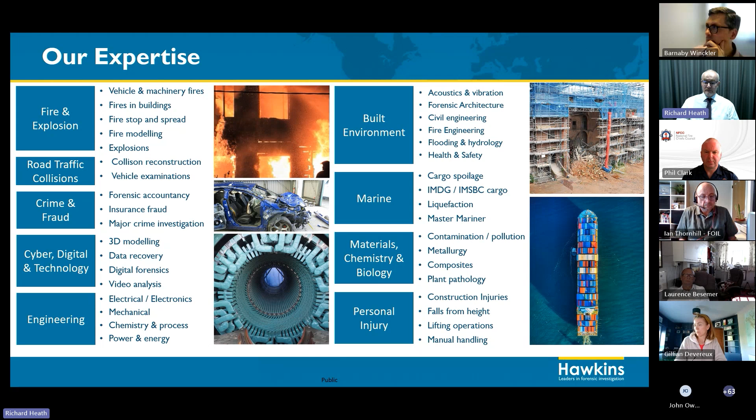When required, we can do a full investigation in order to formulate a clear and impartial report for the support of any legal action. We've got about 130 experts with impressive academic credentials, diverse specialisms and practical industrial experience, and about 50% of Hawkins investigators are PhD qualified or chartered. All of us have some form of prior industrial or commercial experience. And we've got 10 offices dotted around the UK and Ireland, and 3 overseas offices also.

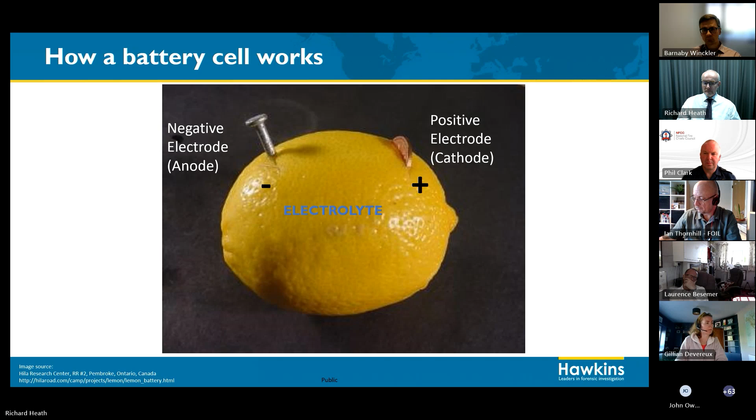And a lithium-ion battery is no different. You essentially have a container of some form with an anode and a cathode and an electrolyte between them. In lithium-ion batteries, the anode is typically a powdered carbon material fixed onto a copper negative current collector. The cathode is a powdered metal oxide active material of varying chemistry, which we'll go into a little bit later on, and that's fixed to an aluminium current collector.

You then have a flammable organic solvent containing a lithium salt dissolved in it. That forms the electrolyte within the cell, and lithium's reactivity is partly why it's used. It's also why the electrolyte is organic and flammable, because lithium reacts quite vigorously with water, so you can't make a lithium-ion battery with an aqueous solvent, so you end up using something that's organic and flammable. And then you have a separator between the anode and the cathode, which is there to prevent the two from making contact electrically, preventing a short circuit, but it still allows the ions to flow through it.

And essentially, when you discharge a lithium-ion battery, you're taking current in one direction. Ions are flowing from the anode to the cathode until they're depleted. But with a rechargeable battery, you can reverse the current direction by applying the voltage, let current flow through the circuit, and the ions move from the cathode back to the anode, ready for the next use.

And the construction of the battery is quite important. If the separator becomes damaged in any way, it can allow a short circuit within the cell. And the other components used to construct a lithium-ion battery can actually react exothermically, in a heat-producing way, if they come into contact, and it's the design of the cell which is really keeping those substances apart from each other.

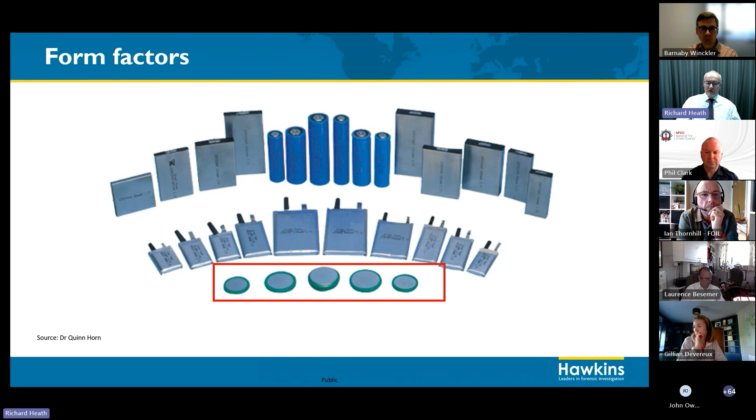Looking in a bit more detail at a cylindrical cell, an 18650 cell, so-called simply because of its dimensions. It's about 18 millimeters in diameter, about 65 millimeters long. It's basically a bit larger than an AA cell. It has a terminal voltage of about 3.7 volts, which is higher than your average AA cell. And capacity is between 1500 and 3500 milliamp hours.

To give that some context, at 3.7 volts, at that sort of capacity, it's great for head torches, small portable devices, but it's too small for any application that requires more power. So they tend to be put together in combination to form larger voltages and larger capacities. And it's those that are commonly used in electric bikes, e-scooters, and laptops.

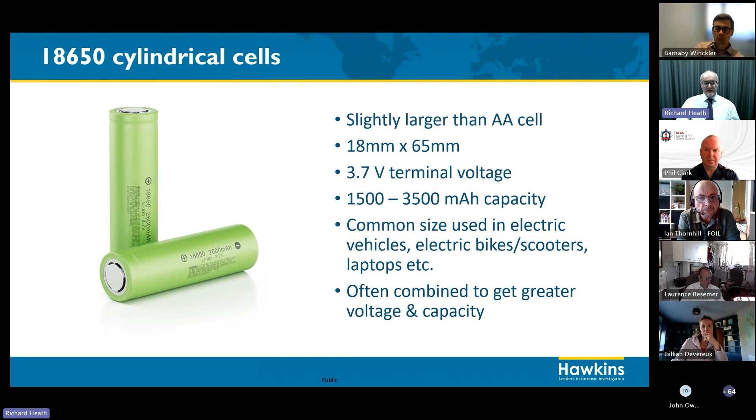Now, if we can take a cross-section slice through a cylindrical cell, so this is a CT scan through different types of battery. We've got our standard alkaline battery on the left-hand side, the non-rechargeable Duracell type, rechargeable nickel metal hydride in the middle, and then the lithium-ion battery on the right. And the striking thing really is just how densely packed a lithium-ion battery is. It's that density of design that allows a very large surface area for the active materials in the cell, which provides it with its capacity.

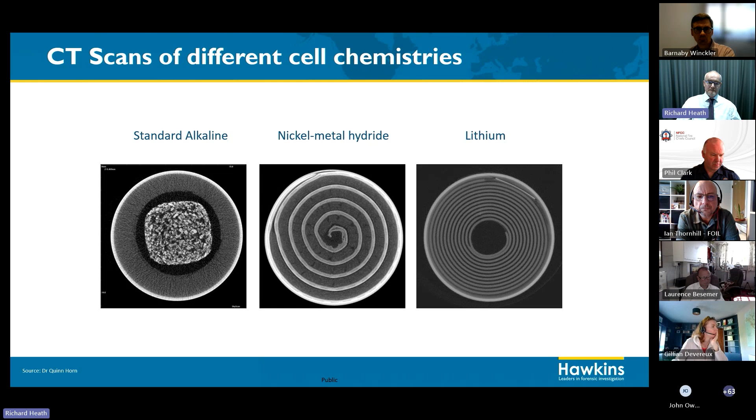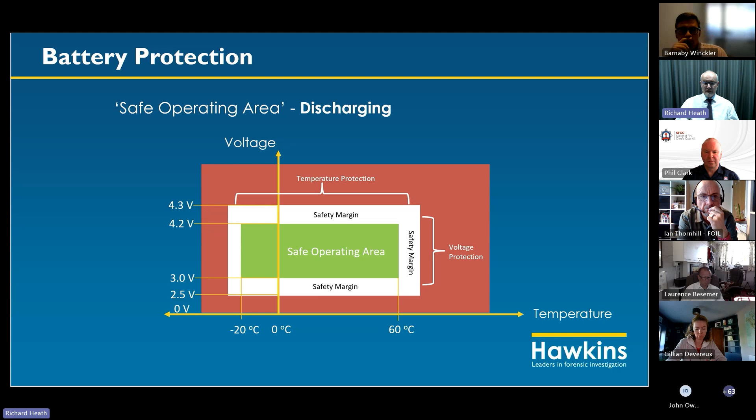If you take it to temperatures outside those areas, if you operate them at voltages, both over voltage and under voltage, outside those areas, you can get into the red area where you can then be causing damage to the insides of the battery that can then go on to cause problems later on. So in order to ensure safe operation of lithium-ion batteries, they tend to be provided with protection systems which control the voltage to remain within that safe operating range and to control the temperature within that safe operating range as well. This chart applies to discharging.

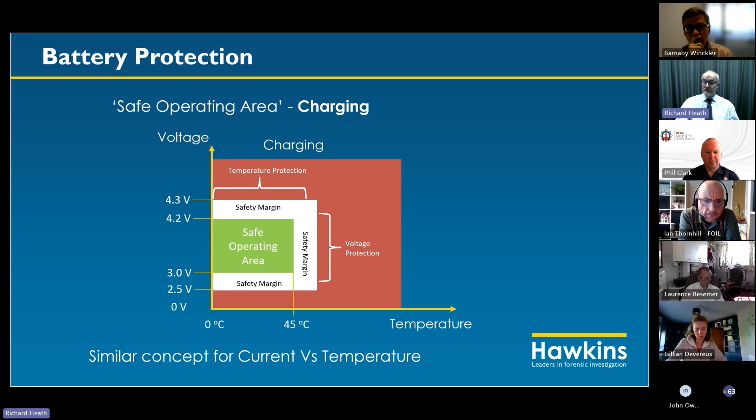Something similar for charging. The big thing to notice is there's nothing below 0 degrees C, and that's because it's really not recommended to be charging lithium-ion batteries below 0 degrees C, because it can cause damage to the battery when you're doing it. And there's a similar concept for current versus temperature. Again, there's a safe operating range in terms of the maximum current you can safely draw, the maximum current you can recharge with, and the temperatures involved when you're doing that.

So protection systems that tend to be used, some are actually built into the cells themselves, some are built into the battery when you've got several cells combined together, some are built into the device using the power from the battery, and some are built into the charger. And these include things like over temperature detection, checking if the battery is getting too warm, checking the pressure inside the battery. When they start to fail, the pressure will increase. If you have a system to detect that, that's one form of protection that's quite helpful.

Protection against short circuit, connecting positive and negative with no resistance between them. Also protecting against the overcharging of the battery in terms of voltage and current, and the over discharging protection, again of voltage and current. Anybody who's used power tools and has been trying to get a job done, and the battery warning indicator has been telling you for a while that it's getting a bit low, will have noticed that suddenly you get to a point where the tool just stops. It doesn't just slowly wind down and cease. It will just reach a point where it stops. And that's essentially the protection system in the battery saying this battery has become too discharged to be safe, and it just turns the battery off.

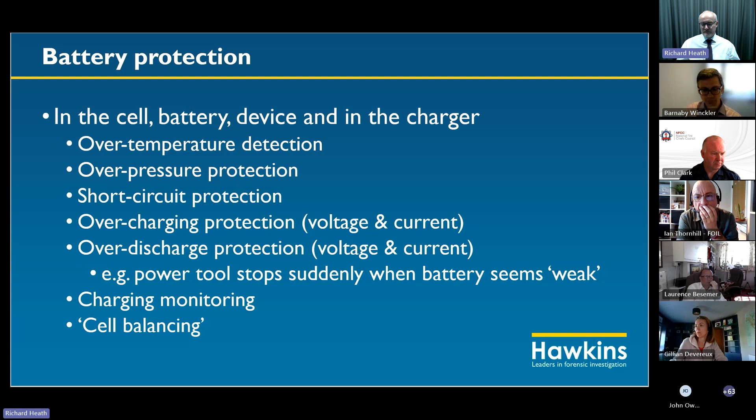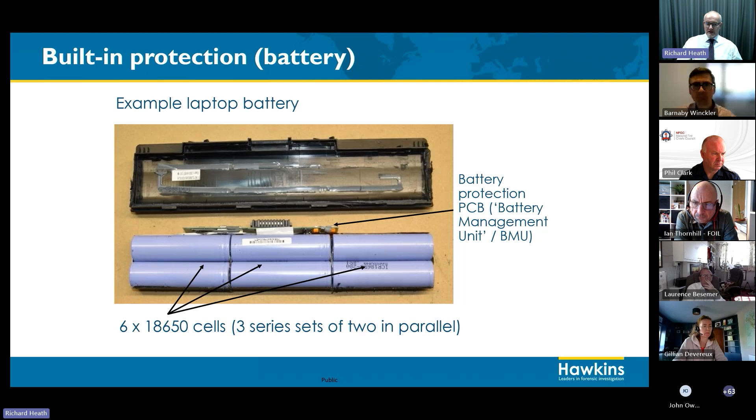And protection systems also include charge monitoring and cell balancing, which is when you've got a long chain of batteries connected together, it's monitoring the charging process to ensure that the charge is evenly balanced between the cells. So this is an example of a laptop battery that's been opened up, and you can see there's a number of the cylindrical lithium-ion batteries inside it, all connected together to provide more voltage and greater capacity. But inside that plastic casing, there's also a circuit board, which is providing the battery management and battery protection systems.

And at a larger scale, this is the sort of battery you might find inside a larger e-scooter or a hoverboard. And you have a large number of the cylindrical cells all connected together in different ways to provide greater voltage and capacity, fitted to a circuit board. And on that circuit board is the battery management system, or BMS, which monitors the charging process. And really, it's the BMS and the charger together that control the charging of the battery, and ensure that the battery pack is being charged and discharged within the safe operating window that I showed earlier on.

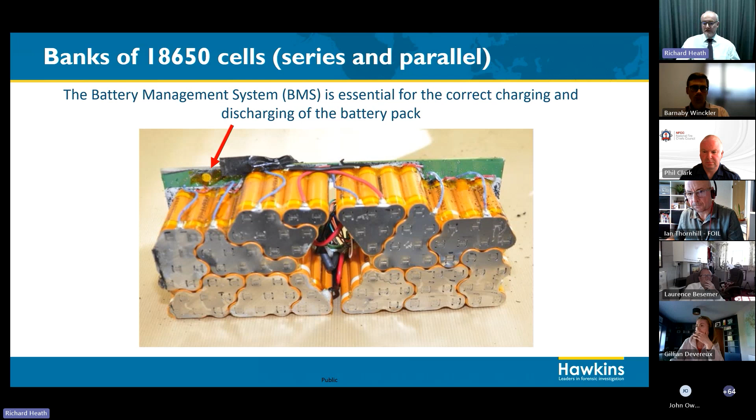And with EVs, as you might expect, there's much more sophisticated monitoring that can happen. Within an EV, quite typically the battery is built into the lower part of the chassis beneath the passenger compartment. And a lot of cell monitoring and pack monitoring can go on in terms of checking the operating current, voltage and temperature. A lot of work is done to estimate the state of charge and the remaining duration. That's obviously a key thing for a driver, to know, well, how much range have I got left in my car? And again, looking at this cell balance.

And you tend to have extensive protection built into the battery pack itself in terms of disconnects that will automatically disconnect parts of the battery or certain groups of cells if faults are detected. You have the charge management and also active cooling. So more recent lithium-ion batteries in EVs tend to have cooling systems with liquids running through the battery pack to keep the operating temperature within that safe operating window.

So why are lithium-ion batteries a problem? Some numbers for you. London Fire Brigade has described lithium-ion battery fires as the capital's fastest emerging and growing fire risk. In 2019, LFB reported 8 fires caused by e-bikes and scooters; that had risen to 24 in 2020 and 59 in 2021. By 2022, LFB had attended a total of 116 fires. 87 of those were e-bikes and 29 were e-scooters. And in the first half of 2023, LFB said that on average it was called out to an e-bike or e-scooter fire once every 2 days. And this is not just in the UK. Fire officials in New York City have observed a similar phenomenon.

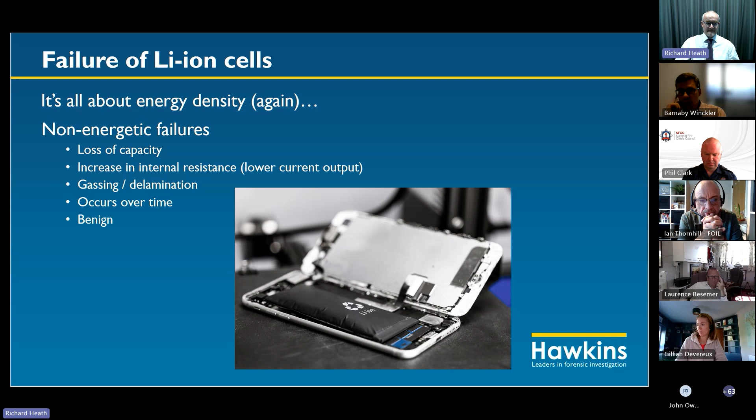And if the battery can't lose the heat that's being developed, the temperature will increase and take it further up the chart into areas where other things start happening. So the solvent will start reacting with the anode in a way that produces heat. Again, if the heat can't escape, the battery gets hotter, and then the electrolyte will start to decompose in a way that also causes heat. And you eventually get to the point where the internal pressure is increased, oxygen has been generated, the cell will vent. Often there are flammable gases, often they will ignite, and then you see the dramatic sort of firework effect of the cell failing.

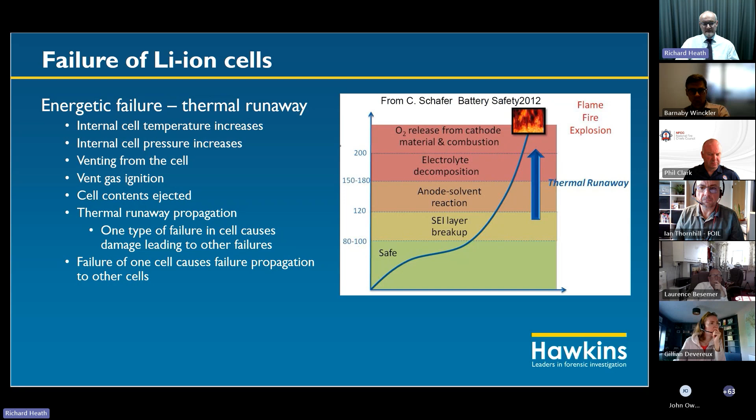So you get this process of internal cell temperature increases, the pressure increases, gas gets vented from the cell, often the venting gas ignites, and the cell will rupture and eject its contents. And the important thing to know, and I'm sure you've all seen examples and videos of this, is that you get this propagation effect where you've got battery packs made up of a number of cells. Failure in one cell will then heat the adjacent cell, which then fails, and then the next cell and the next cell, and you get this propagation throughout the entire battery pack.

So what can be behind these causes of failure? Well, at the very beginning, poor electrochemical design, the choice of cell design and the chemistry inside it, but also cell or battery faults due to problems during the manufacturing of the battery itself. So effectively, these are manufacturing defects. And then beyond that, we've got defects that occur during use. So mechanical abuse, mechanical damage to the cell, thermal abuse, not using it in a way that keeps it within that safe operating window, electrical abuse, which I'll talk about a bit more later, and DIY battery replacement is becoming quite a big thing that we're seeing with people who have e-mobility, e-bikes, e-scooters.

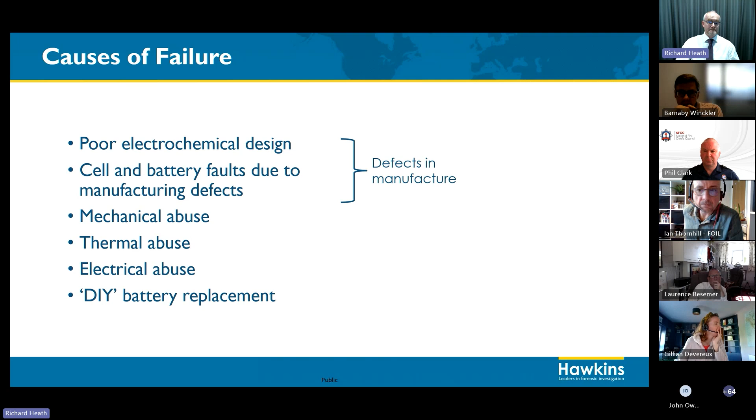They're using them a lot. They need to replace the battery. The OEM batteries are very expensive, so people look to either buy cheaper batteries or even try and build their own batteries using cheap cells they can get elsewhere. And so those are defects in the use and the disposal of the battery.

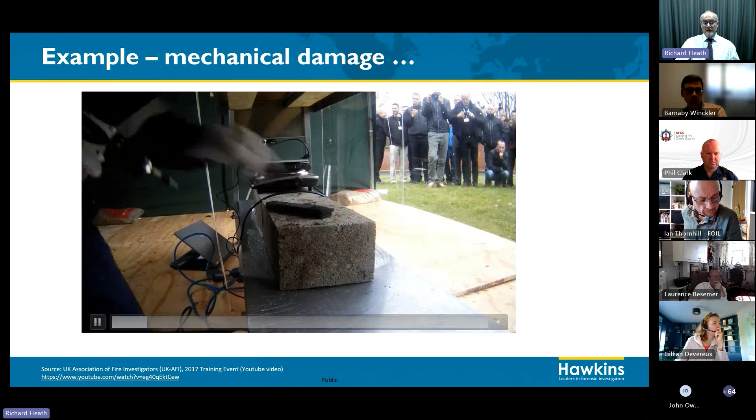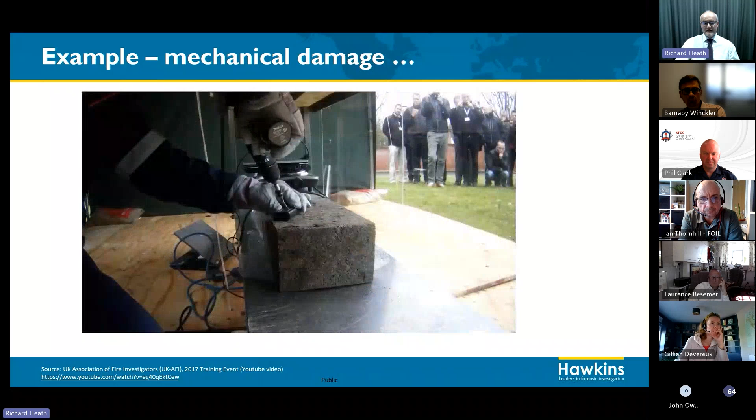So now, an example of a lithium-ion battery being abused. This is a plucky investigator, fully equipped with PPE, driving a screw into a charged laptop battery just to try and simulate the effects of a short circuit. And nothing seems to be happening initially until the screw makes contact with the relevant internal parts, and then the cell reacts quite violently when it gases. If you look, you can just see a couple of sparks are ejected. There's no flames in this case. It's just a venting and a rupture of the cell. But often that results in ignition of the gases as well.

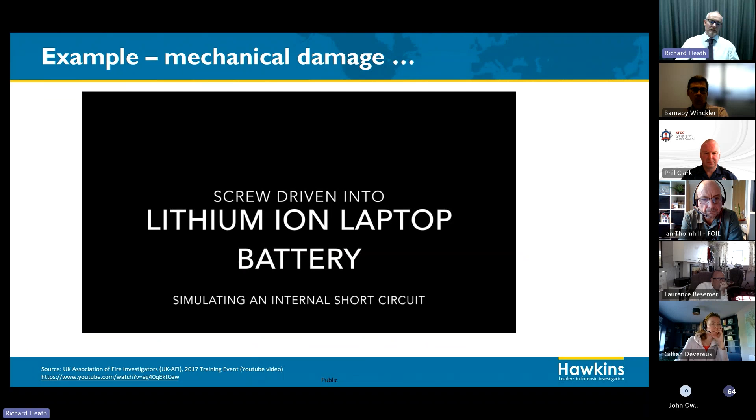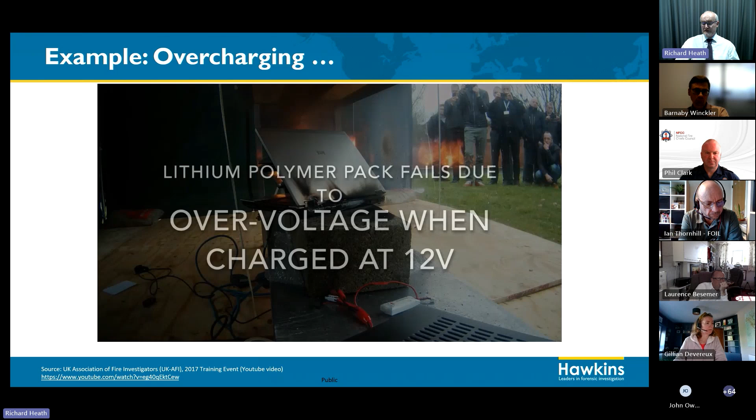And in the next example, we've got a lithium-ion battery which is being overcharged. It's a bit quick. Essentially, the cell in the bottom right corner, the little white cell, is the one to watch. It's a 7.2 volt battery, the sort of thing that would be used in a remote-controlled car or a drone, something like that. But it's been connected to a 12 volt charger with no protection circuits fitted at all, so it can just continuously charge at 12 volts.

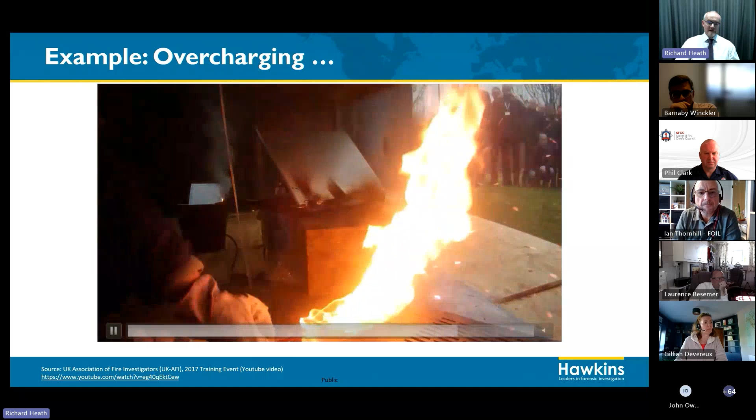And so it's been sitting there quite happily charging for a certain period, and then you see it start to off-gas, and then it vents. You get the flames from the igniting combustible venting gases, and then if you watch, you see a second flare as another one of the cells in the pack also ruptures.

So going on to the electrical abuse I mentioned earlier on, this is really a form of incorrect use that results in either overcharging of the cell or the use of an incompatible charger. The image there is trying to show that we all end up with a bucket full of chargers at some point. It's very easy to pick up and use one that's not provided originally with the lithium-ion battery product. Or it can also be people obtain a replacement charger that's not compatible with the cells they have.

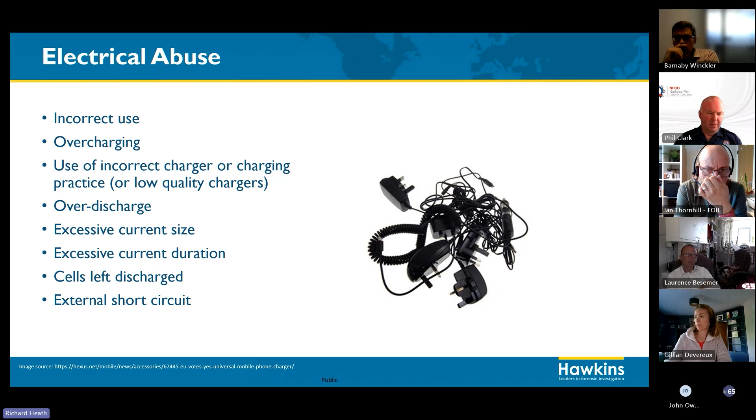Sometimes the cells can be over discharged, which can cause internal damage, or used to try and draw too much current from them or for too long. And also cells being left discharged. If you leave a battery uncharged for a long period of time, the self-discharge process that's there in any battery will eventually reduce the cell voltage and take you outside that safe operating window, start to cause short circuit. But again, I want to emphasize that these particular abuse situations are ones that are really meant to be addressed by the external protection systems that should operate to prevent any of these conditions happening.

So then why are the failure incidents occurring? Properly designed, made, handled, used and disposed of, lithium-ion batteries are safe. Bear in mind that there are many millions in use daily without any problems at all. The problems occur when you have design and build compromises where cost and quality are traded off, in poor handling, either during shipping or use, where the cells get damaged, poor use in terms of improper charging, or people building DIY battery packs, and improper disposal.

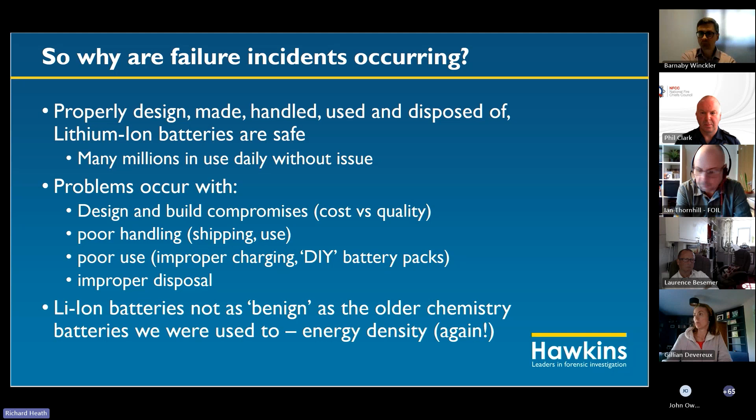And the key message really is that lithium-ion batteries are not as benign as the older chemistry rechargeable batteries we were used to. We couldn't just abuse them in the way we always have done and expect them to behave themselves. Again, that's what the protection systems are for.

Moving on to some of the shipping aspects. So all lithium-ion cells and batteries are classified as being dangerous goods. They're assigned to class 9, which is the miscellaneous dangerous substances and articles, because they don't meet the test criteria of other classes. Now that's important from a shipping point of view, because it means that it's the least hazardous ranking, and means that cargoes of lithium-ion batteries can be stowed above and below deck and alongside other dangerous goods.

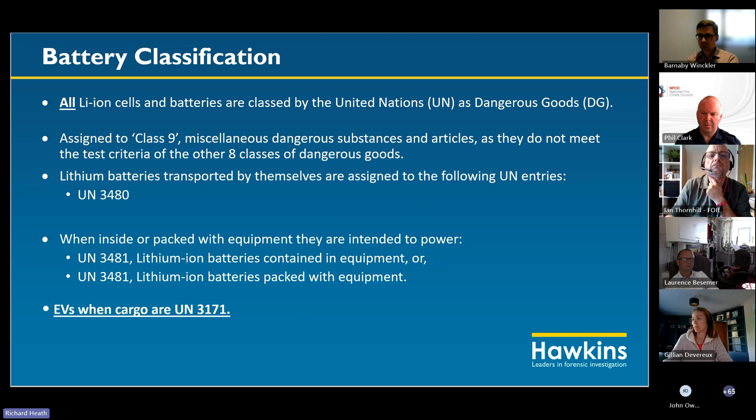And there are various categories that batteries are assigned into, depending on whether or not they're being transported by themselves, whether they're being transported packed within a product, or whether they're packed alongside a product inside packaging. EVs themselves have their own particular classification. And all lithium-ion cells and batteries that are going to be transported have to go through type testing to ensure that they are safe. Both cells and packaging need to be tested.

And this table here really just tries to summarize the kind of tests that they go through. So tests that simulate altitude and drops in air pressure to simulate being transported by air, tests of temperature to ensure they remain stable within temperature ranges, simulated shock and vibration, short circuit, simulations of impact, so boxes of batteries being dropped during shipping, and crushing tests as well. Tests of overcharging and forced discharge testing. And all of these, the idea is to check that the cell or the battery doesn't fail in a catastrophic way.

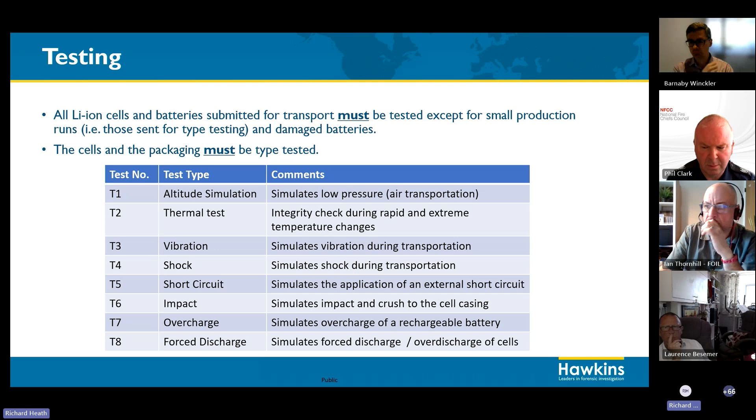The packaging is important to prevent both physical damage, short circuit, and also water ingress. The packaging chosen depends on the mode of transport and the size or number of cells that are going to be in there. UN stamped packaging is an easy way of showing that packaging is compliant, but it's not always something that's required. When it comes to choosing the type of packaging, there are various flowcharts available to help the choice of packaging and labelling that's needed. Packaging needs to be marked clearly in accordance with the relevant code, if already damaged lithium-ion cells are being shipped away for investigation, for example.

Some considerations that we've come across when it comes to these aspects is the packaging is very important to prevent both mechanical damage and also water ingress. And the packaging itself mustn't react with the cargo itself, with the batteries inside. It's expected that shippers should check the condition of the packaging of the cells before they're loaded into the container, so any damage to the packages can be detected before they go on the ship.

Battery state of charge during shipping is important. It's been shown that the heat release rate in a fire involving lithium-ion batteries increases in terms of kilowatts with the state of charge of the battery. So typically lithium-ion batteries are shipped at about 30% charge. You can't ship them with no charge, as I've said from that slide earlier on. A minimum voltage is a bad thing in a lithium-ion battery, and state of charge tends to be between 30 and 40% for EVs. And the stowage location is also important as well.

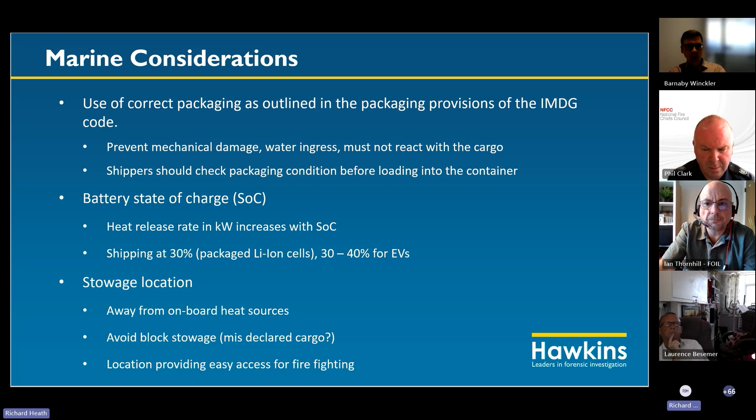So colleagues of mine have seen examples of cells inside containers in a hold that are still on fire despite the hold being flooded by CO2, and that atmosphere being held to create a nominally inert atmosphere for several days. We've also seen containers that have been discharged from a vessel still on fire, despite the container having been flooded with seawater for many days.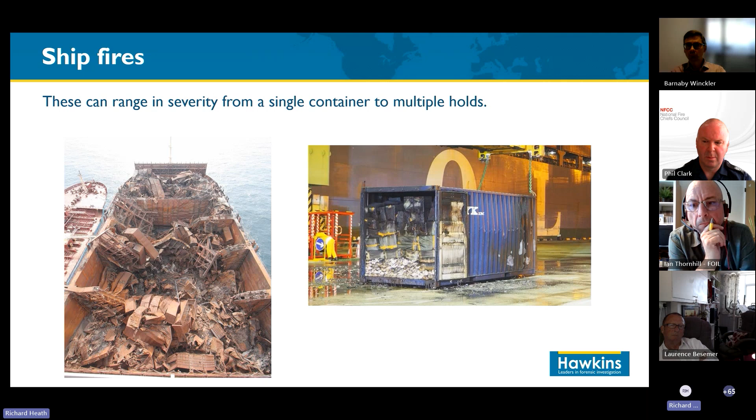And often the fires are only truly extinguished when the container is brought onto the quayside, the contents removed, and either wetted or it's left to burn itself out. So some examples of how we've come across cells being packaged. There are many ship fires each year caused by lithium-ion cells being transported as ordinary cargo and therefore not being treated with the due care that's required. Often there's about 250,000 of the 18650 sized cell in a single container.

And in this particular slide, the package on the left with the purple cells, they were grouped into blocks of 4 with nothing at all other than the cardboard outer box to protect the electrodes and short circuits from being formed. The dark blue cells were a little bit better. They were packaged into groups of 25, but they only had some paper over the electrodes.

And the example with the blue cells is typically what we tend to find. They're packed in blocks of 20. And ideally, or to comply with the code, each cell should be wrapped individually with both electrodes covered to prevent the risk of a short circuit. There are almost invariably issues to do with misdeclaration and incorrect packaging.

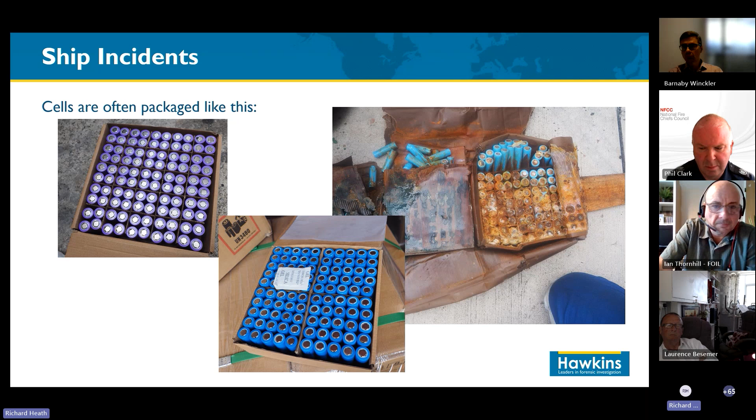And in this case, the container was in a hold, the CO2 system had been deployed, and the fire was thought to have been controlled, and it then flared up when the container was lifted out. Damage was really only originally at the far end of the container away from the doors, and the crew had done everything right in terms of flooding the hold with CO2 to inert the hold and then keeping that topped up until the hold was open when the ship reached port.

But 20 seconds after the door was open at the non-fire damaged end of the container, smoke suddenly increased, crackling noises could be heard, and the fire developed very quickly. So some of the lessons learned so far is that container fires where you've got lithium-ion batteries cannot be put out using conventional CO2 flooding because the cells during the late stage of failure can provide their own oxygen supply.

Fires in lithium-ion batteries stored in a hold are very difficult to contain and extinguish. The only solution often is to flood the container with seawater to cool the cells down and try and stop them from reacting. Flooding them with seawater can also cause the cells to discharge. It's partly conductive and reduces the fire risk going forward.

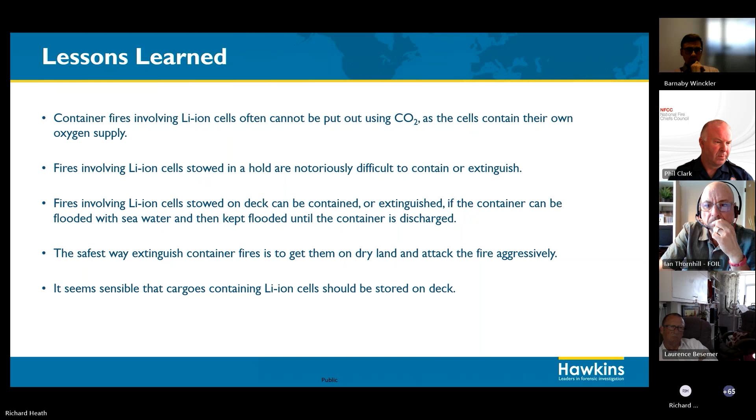As for EVs, there's been a lot of bad press about EVs. We've had that discussed this morning already, and perhaps it's not as bad as we think. However, there's not just a risk from fires originating at the EV. Just having EVs on board a ship presents a significant risk due to the fuel load they represent if they're affected by fire spreading from some other source.

An EV will contain in the region of about 7,000 lithium-ion cells. And bear in mind, the EVs cause fewer fires than internal combustion engine vehicles. But the problem is that they are notoriously difficult to extinguish. And they tend to keep burning and be quite dramatic, so they tend to get reported on quite a lot.

They tend to be shipped at the worst possible time in their life cycles. So vehicles that are new or vehicles at the end of life will contain battery packs that are the most likely to fail by thermal runaway through either early life or end of life failures. So the risk profile for those categories of cars is somewhat skewed. For new vehicles, it's also potentially the first time the battery's ever been charged. New vehicles are often charged for the first time just before they're shipped.

There are various types of transport mode used with EVs to minimize the amount of active electrical circuitry while it's being shipped. But there are variations between manufacturers as to what that transport mode involves. For example, keyless entry systems need to stay on in order for the car to be moved at either end of the shipping process. So it's not always clear what circuits will remain energized within the vehicle during shipping, and that potentially makes it difficult to assess the risk presented by EVs.

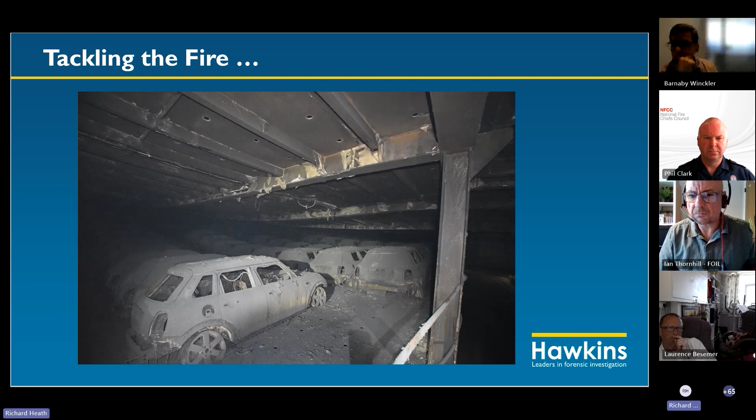So just a few comments on investigating lithium-ion battery fire. As with all fire investigations, it's a case of initially obtaining all the relevant background information about the circumstances leading up to the fire. It's particularly important with lithium-ion batteries because due to the ferocious nature of the damage that often occurs, there can be very little physical evidence left. So a lot of the investigation is steered by the information that can be gathered about circumstances before the fire occurred. So we'll be looking to establish particular circumstances leading up to the event.

How was the fire discovered? Were there any appliances involved? If EVs or lithium-ion batteries were involved, was the appliance charging? What equipment was being used? Was it an original manufacturer charger or a third-party charger obtained later? We'll be looking to try and get some indication of the age and condition of the appliance or any service history that indicates there may have been a fault developing in the battery, and whether there are any digital records that could be available to help.

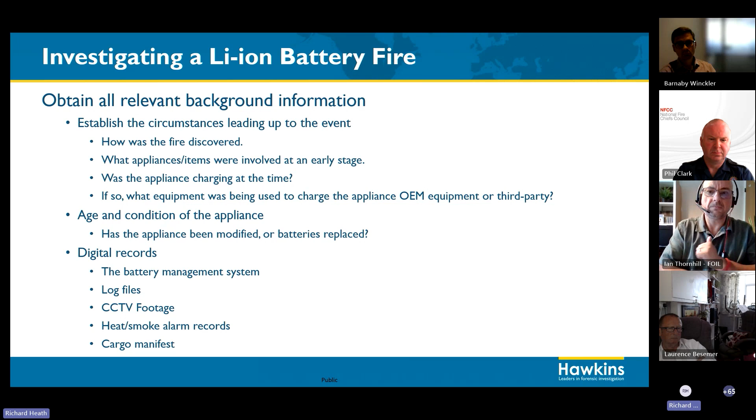CCTV footage is becoming more and more widely available, even in the home, and the footage from those cameras can be quite useful at pinpointing the fire starting at a particular item. Examining the scene itself is a case of scrutinising the patterns of fire damage to try and determine where the fire started, and then you can understand what items are stored in that area, either the building or the vessel, to try and start narrowing down what the cause of the fire may be.

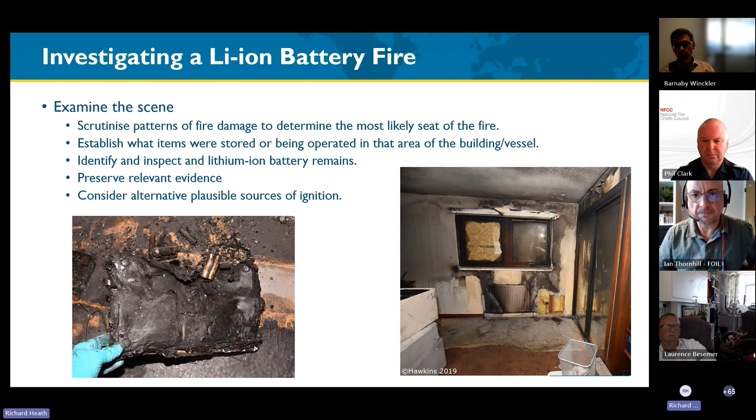Identifying the remains of any lithium-ion batteries will be important, as is preserving any relevant evidence that comes from your site examination. And it's important to consider all the various possible sources of ignition that are out there. And some of the challenges that are specific to lithium-ion battery fires are cause versus effect.

If you have a charged lithium-ion battery and you expose it to heat from a fire starting elsewhere, it will then go into thermal runaway and fail in a way that a cell that's had an internal fault would also do. So essentially, a failed lithium-ion cell and one that's just been attacked by a fire can look very similar. The components inside the cell are very lightweight, so once there's been any kind of fire damage or after the battery's gone into thermal runaway, there's often very little left of the internal of the cell anyway. So identifying cause on that basis alone is very difficult, as is establishing the provenance of the cell.

And that's where exemplar cells can be very helpful. So you might have somebody that's bought a number of batteries. One of them has failed when it's been on charge. The others were tucked away in a drawer somewhere, and they can sometimes show, when they're examined, features that suggest there was a problem with the manufacture or the assembly of the cell.

One of the problems with the firework nature of the way that the cells tend to fail is that individual cells can be projected across a compartment and start fires remote from where the fire originally began, and that can cause misleading patterns of fire damage. If we have to excavate a large area to find the component parts, that can be quite a lengthy exercise.

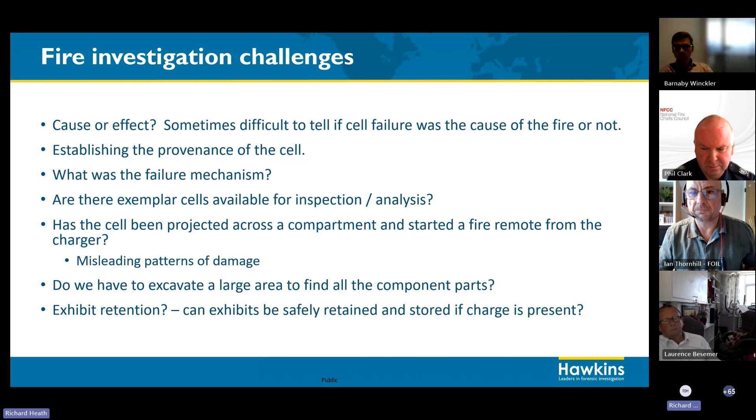And we're increasingly seeing a problem with exhibit retention as the batteries that are involved in these failures get bigger. We're finding that not all of the batteries have been affected by the fire, or extinguishing the fire has been able to limit the damage to only one section of it. And the question then becomes, well, is there energy left in the remaining section? Is there a risk that if we retain this as an exhibit, it might then have an ongoing failure while it's in our stores or in an investigator's vehicle?

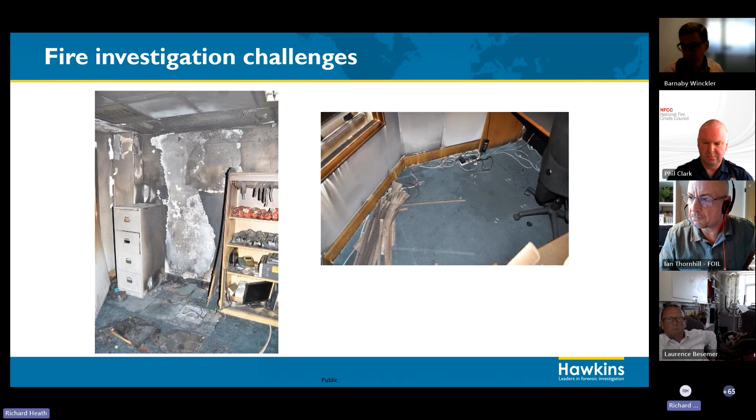So just an example here, this was a fire in an office, and there's a big scorch mark on the wall where a timber cabinet had stood, where the business had stored its lithium-ion battery-powered laptops. A fire occurred there, but on the other side of the room, we found the remains of, or fragments from, one of the lithium-ion batteries that had been projected across the room during the failure.

Now, in this case, it wasn't a problem because the fire in the other area of the room hadn't taken hold. But if that had landed on something combustible or in a waste paper basket, for example, you could then end up with a second seat of fire. And that can affect how the patterns of damage are interpreted in terms of where the fire first started. But more importantly, when you have a fire that appears to have several separate seats of fire, it's generally considered that it might have been started deliberately.

So just in summary, lithium-ion batteries are ubiquitous and are now involved in all aspects of our lives due to their high energy density. Our demands on them will only increase, and in the future they'll be getting bigger in terms of both electrical capacity and physical size. Incidents of fires involving lithium-ion batteries are increasing with that demand, and especially e-mobility is posing a particular problem at the moment. There's a big problem with people using e-scooters and e-bikes with non-original equipment manufacturers or trying to replace the batteries with cheaper alternatives or make up their own battery packs.

But cell design is evolving. The newer chemistries are safer, they're better in some ways, but often involve a trade-off in others, for example, being more stable or better in colder temperatures, but having less capacity. Overall, the current common technology in use is sensitive to mishandling and misuse during shipping, operation and disposal. So I think there's a lot to be done in terms of education and awareness for the users, but possibly more could be done in terms of legislation to control poor quality batteries or poor quality chargers going into use.

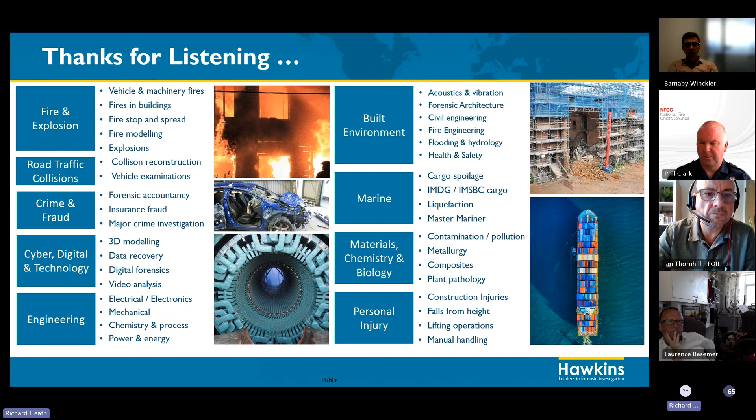And when that laptop fire was going on, I could swear I could smell burning from my laptop, which is a bit worrying.

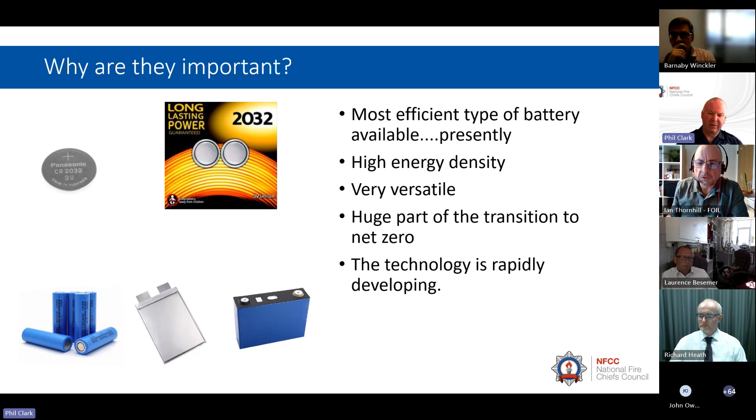They come in different forms, coin, cylindrical, prismatic, and pouch, and together they make those large modules which Richard showed. Often people ask, are they dangerous? At the minute, it's a relatively new technology, so we've still got a lot to learn about the aging process and what that means for their performance and stability. The majority of the electric vehicles that we use at the minute are still under warranty, and people haven't begun replacing the charging cables, etc. And I wonder whether people will go back to the manufacturers for replacement. And the challenge to yourselves is, what do you all do about your mobile phones and how you charge them when the charging cable breaks, or when your children steal the charging cable?

Do you go back to the manufacturers and buy an expensive one, or do you go to the global marketplace? And we've still got to think about what's going to happen with charging cables in the future and whether people go to that marketplace to buy them.

Where the batteries are manufactured correctly and they are connected to a good quality battery management system, as Richard's mentioned, and we use them correctly and charge them correctly in line with what the manufacturers instruct us to do, and we use the correct charger for the device, they can be safe and stable.

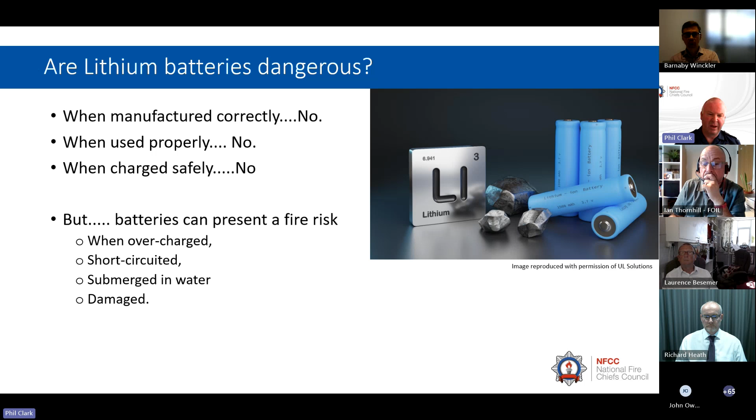However, when we don't do this, as in if we allow them to be overheated, such as people charging laptops or a phone on a bed or under a pillow, or allow water to enter the battery casing, or we continue to use them when the battery becomes swollen, damaged, or deformed, they can become a huge fire risk with devastating consequences. And sadly, we've lost more than 7 people in the last 12 months due to fires in buildings as a consequence of that.

I'll not go into the details of thermal runaway because we've talked about that, but the key thing that I want you to take away is the fact that whether it's a vape, an e-scooter, a car, a grid-scale battery energy storage system, the process and initiation causes of thermal runaway is the same. The only difference is the amount of energy that's involved. And Richard's gone into thermal runaway, conscious of time there.

But in terms of initiation, it could be simply that there's a huge piece of metal on the road and you drive over that with an electric vehicle and that pierces the underside of the vehicle. It could be through poor DIY, people buying things from a global marketplace and putting products together which aren't designed to go together, or it could be a defective battery management system, or using the wrong charger to overcharge the battery.

And what we see is where products have been designed and manufactured to a really good standard, there will be a good quality battery management system in there as part of that charging to protect the device. But often that isn't the case with the cheaper batteries, scooters and bike conversions that we can see on the global marketplace.

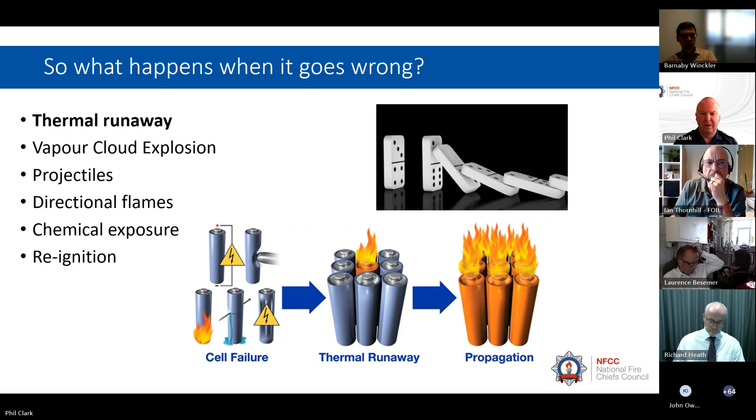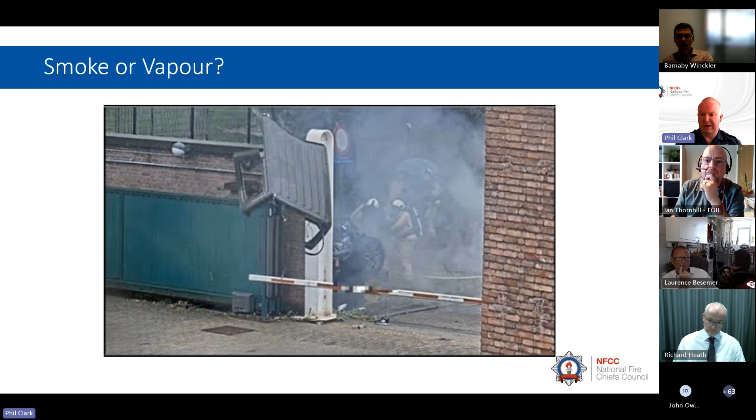So when thermal runaway occurs, we've seen it is rapid in terms of the development, and where items are charged and stored in a home, it can affect people's ability to escape in the event of a fire. From a firefighter's point of view, the fires involving lithium-ion batteries are really, really difficult to deal with. Since we've lived in caves, the main method of dealing with fires is via the application of water.

But thermal runaway, as you'll see from the video, is a reaction that will continue in the absence of oxygen. So even if we immerse the batteries in water, the reaction continues with a flammable and toxic gas continuing to be produced. As such, depending on the size of the battery, they can become protracted incidents for firefighters to deal with. As often with the larger batteries, firefighters will choose to allow the battery to consume itself rather than actually interact with it and deal with it.

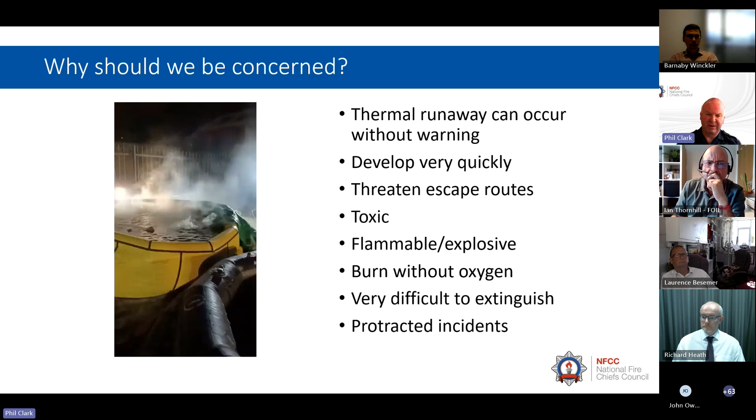So what can firefighters do? So the objective, that's what we're trying to achieve, is to prevent further cell propagation. There is no one single solution anywhere in the world that will deal with the extinguishment of lithium-ion battery fires. We need to try and cool the cells to stop the cells propagating and generating more heat in our thermal runaway. We're going to struggle to put the fire out, but we might be able to prevent further thermal runaway

through cooling. But that takes time, and these incidents are protracted. They can last from hours to days depending on the battery size. The difficulty we have is when the batteries are manufactured, they're designed to try and keep water out the cell, and that's for good reason. So when we're trying to apply water, we're trying to get water into the cell, and we haven't got a tactic for allowing it to get in there.

So really, what we end up with is allowing the battery to burn out. And I've got to admit, it's easier to achieve this in rural areas rather than city centres. So if a car's on fire and it spreads to the battery pack and it's in the middle of the countryside, we can allow it to burn out. And then it's far better for the environment, the smoke, believe it or not, to go into the atmosphere than for us to put 10,000 litres of water on there and wash that all into the watercourse. And it's not uncommon to hear about that quantity of water being used on a battery fire.

And that challenge is always to firefighters, did it actually extinguish a fire? Or did the battery just consume itself and we've just washed all that heavily contaminated water into the system? The big difference between the size of the batteries is with the smaller devices, often the device is consumed itself by the time the fire service arrive. However, it will have spread to other items around it, and we call this almost like a piloted ignition. So within properties, you will see fire spread, and by the time the firefighters get in there, it's extinguished itself. But with the larger devices, such as vehicles and battery storage, it's likely that the incident will still be developing when the fire service arrive.

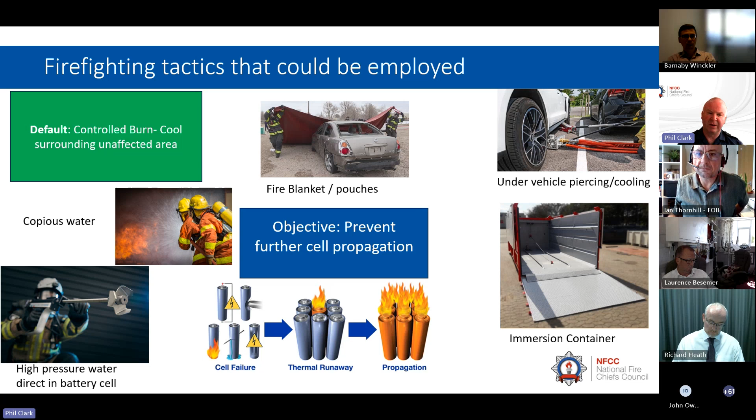So people have asked questions about the data picture, and currently we don't have a definitive picture in the UK about where the fires are occurring. And that's because the Fire and Rescue Service used the National Recording System, which was geared up around things being powered by petrol, diesel, and LPG. So we're not currently recording the types of propulsion system that's in use when things are involved in fire. So what we are seeing is more injuries from fires involving bikes and scooters than in vehicles. And the main difference is that these are charged inside the home rather than outside.

Many are purchased via the global marketplace, and you've got to think, do they meet UKCA standards or CE standards, or indeed is there a standard in place? And we've talked about maritime before there, but also if you think of the smaller shipping, you think of the super yachts and things like that, people are going all over the world buying things, putting them on their yachts, and these are a new ignition source in there.

Many of the fires that we've seen in the UK have involved people who are in the gig economy, where the bike has got a poor quality e-bike conversion. And what we're finding is where people are living hand to mouth, they want the bikes to charge quicker, ride faster, and the battery to last longer, which basically goes against all the advice Richard's just given you in terms of how to keep it safe. The fire safety is often exacerbated by those living in high-density housing, such as houses in multiple occupation, charging their bikes in the escape routes.

Fires in electric vehicles still remain rare, and fires involving the battery packs of electric vehicles are rarer again, and it's important that we separate out the two. As I put in the chat there, the data at the minute is suggesting that we're 20 times more likely to have a fire in a combustion engine than in an electric vehicle.

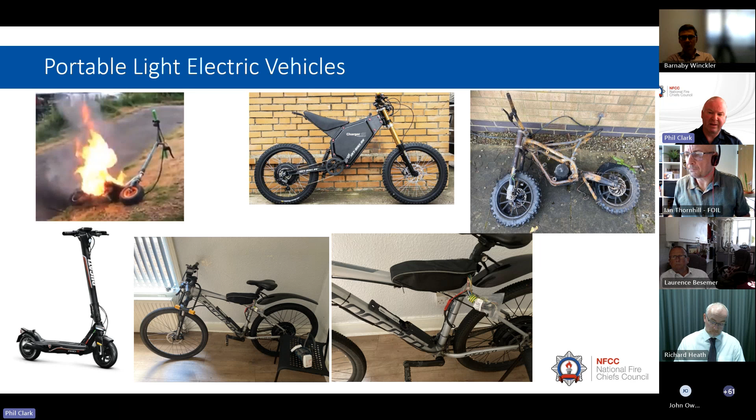So I do think it's important to separate out the good, the bad, and the unsafe. So if we make wise shopping choices, and if organisations buy their products from reputable places, recognise brands, and look after the equipment, they're going to help us.

But if people keep on making economic decisions looking for the cheapest item from a global marketplace, and I use the term fast technology. We went through a phase of looking at fast fashion a while ago, and people saw that that didn't necessarily have the benefits that we all thought it had. But we do see that with technology. And if we keep on going for fast technology and don't follow the manufacturer's instructions, then we all see more fires, deaths, and injuries and economic loss.

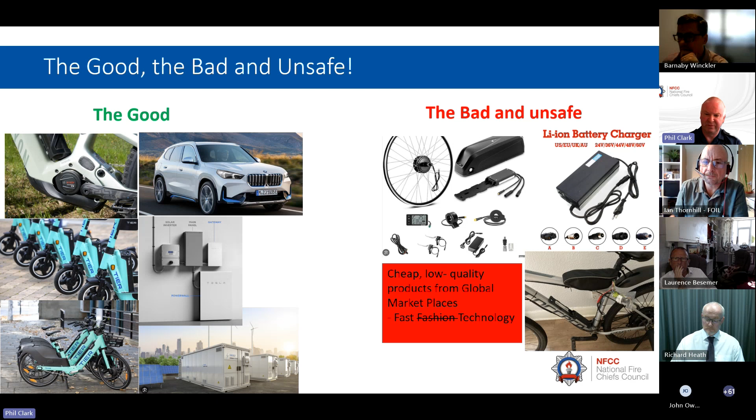The reality is that cars are becoming larger, and as such, the distances between them in car parks are smaller, which allows rapid fire development. It's suggested, based on research from RISE in Sweden, which is a Swedish research institute, that fire will spread between vehicles once every 30 seconds once a vehicle is alight.

They also did research which said that the energy or heat release rate from an electric vehicle is similar compared to that of a combustion engine. The main difference in performance is that the EV will sustain the heat release longer, so it'll burn for longer. Therefore, the issue that we have with car parks is not just electric vehicles, it's all vehicles.

Remembering at present, there's still more likelihood of a fire in an internal combustion engine than the battery pack of an EV. So when we're talking about the mass transportation of vehicles on shipping, it's still more likely to see fires involving combustion engines. And the impact is exactly the same. Where you've got cars parked very, very closely together, even as colleagues have said, even if you had an on-board firefighting team, you're not going to get access to the fire quick enough to stop it spreading so quickly.

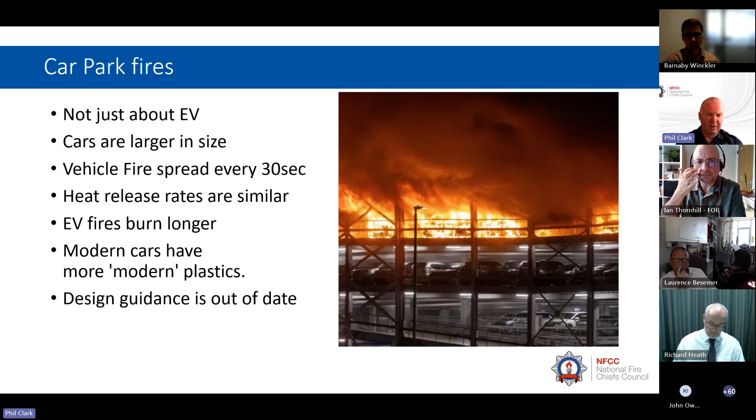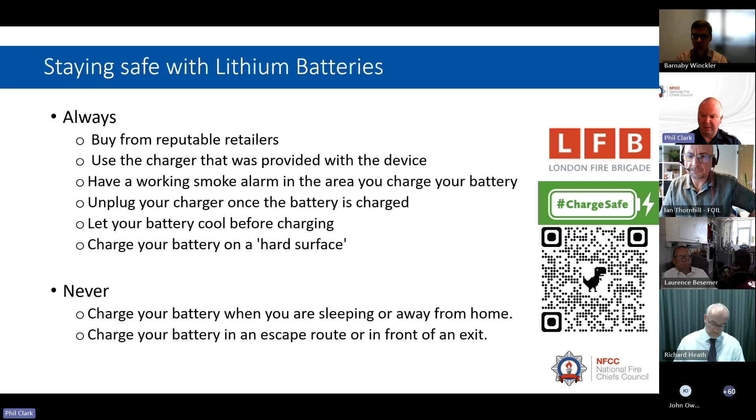And I am conscious of time and going over. But in terms of the solution, for me, there is a simple solution. We need to get upstream and work with the suppliers with a focus on product standards. We need to ensure that the products are safe for consumers at the point of purchase. You shouldn't be able to buy a poorly manufactured battery or charger that you can use for any battery for any instance.

But we also need to acknowledge that we've got to change in our lives, and we need a public information campaign. The public need to know that these items that we're buying need to be treated differently and with care. They need to know the signs and the symptoms when the batteries are deteriorating, and understand how to dispose of them too, because we're seeing lots of fires in the disposal industry, whether it's a fire in a bin wagon or a fire within a waste transfer station. Again, there could be insurable loss there.